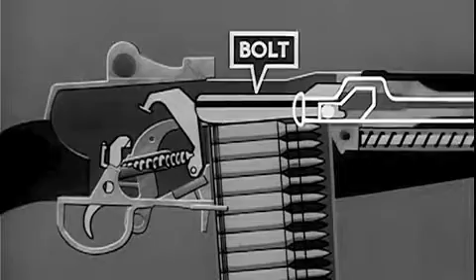To start the feeding step, the bolt is moved to the rear. A cartridge from the magazine is fed into position for chambering by the spring-loaded follower in the bottom of the magazine.

On the forward movement of the bolt, the hammer is cocked and a cartridge is stripped from the magazine. The cartridge is chambered. The bolt is locked. The rifle is now cocked and ready to be fired when the safety is off.

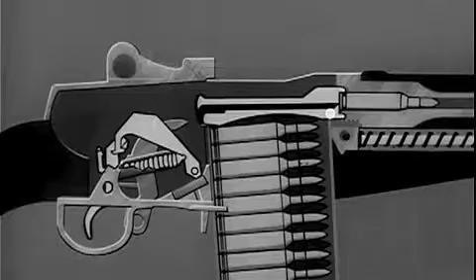By pressing the trigger, the hammer is released, firing the cartridge. Part of the propelling gas escapes to the gas cylinder.

The expanding gas in the gas cylinder drives the piston and operating rod to the rear and the bolt with it. On this rear movement, the bolt is unlocked.

The spent cartridge is extracted from the chamber and ejected from the rifle. At the same time, the hammer is again cocked and the cycle is ready to start over.

Now, let us see in greater detail how the 8 functions or steps are performed.

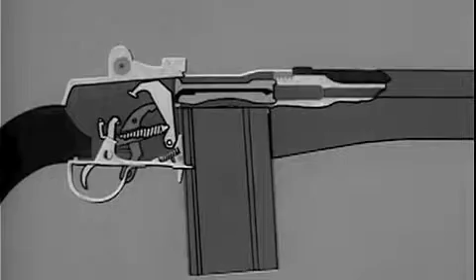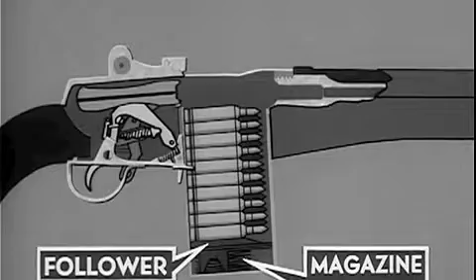When we move the bolt to the rear, by hand initially, the bolt clears the top cartridge in the magazine. The magazine spring, exerting pressure against the follower, forces the top cartridge up in front of the bolt in position for chambering.

Let us look at it again.

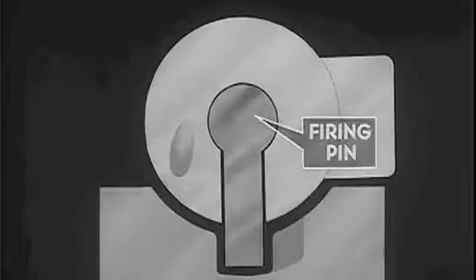When the bolt is moved to the rear, the bolt rotates. Rotation of the bolt during unlocking cams the hammer slightly rearward. It also moves the firing pin rearward as the firing pin tang contacts the camming surface on the bridge of the receiver.

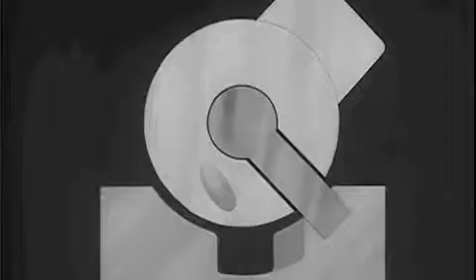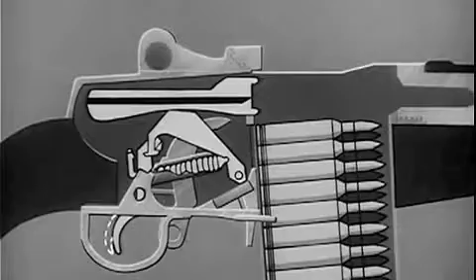As the bolt continues to the rear, the feed rib on the bottom of the bolt forces the hammer to the rear and down, pivoting the hammer on the hammer pin. The bolt continues rearward, riding over the hammer.

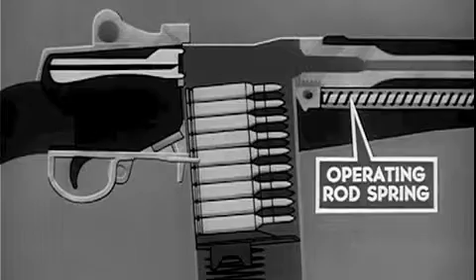The bolt is now driven forward by the expansion of the compressed operating rod spring. The bolt strips the topmost cartridge from the magazine. The cartridge is deflected upward by the feed ramp in the lower rear of the chamber and forced into the chamber.

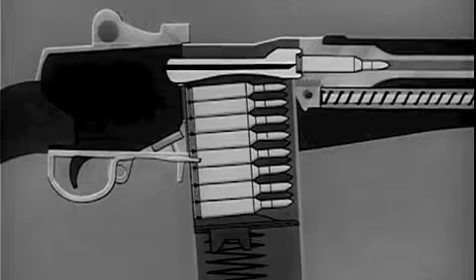Also, on the forward movement of the bolt, the extractor on the bolt face is forced outward by the rim of the cartridge. When the face of the bolt comes against the head of the cartridge, the extractor spring expands, and the lip of the extractor engages the extracting groove of the cartridge.

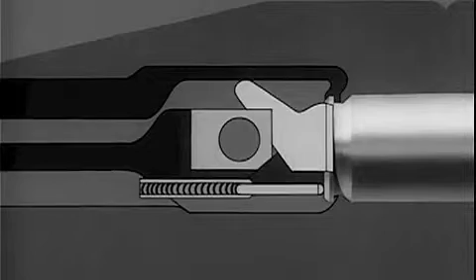Finally, the bolt is locked. Locking of the bolt is accomplished by the rear of the camming surface in the hump of the operating rod.

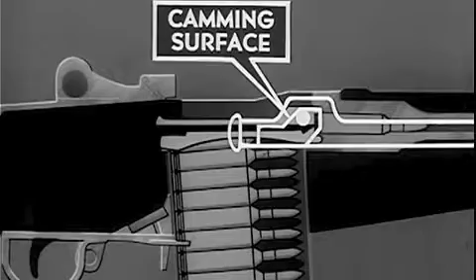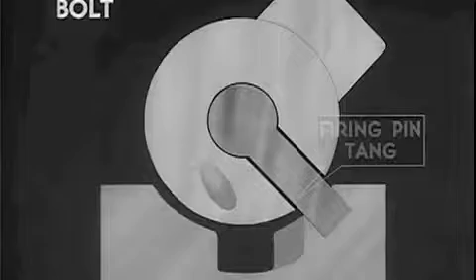The camming surface contacts the anti-friction roller on the locking lug and rotates the bolt clockwise. By the clockwise rotation, the locking lugs on the bolt are forced into the locking recess of the receiver. Meanwhile, the firing pin tang is aligned with the notch in the bridge of the receiver.

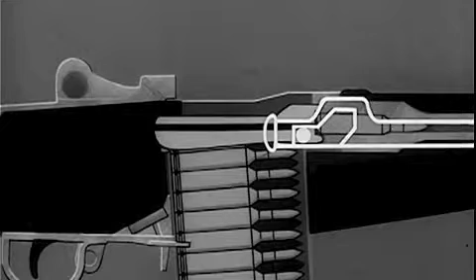The operating rod continues its forward movement for 3/8 of an inch. During chambering and locking, the operating rod is repositioning the gas piston.

With the first round chambered and locked, the next step is firing. Firing is initiated in the firing mechanism assembly, which consists of the hammer.

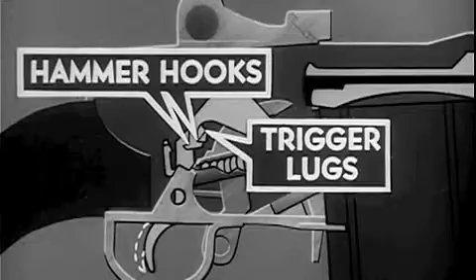The hammer spring drives the hammer and is compressed when the hammer is cocked. The hammer hooks are held by the trigger lugs. The safety engages the hammer and blocks movement of the trigger when in the rear safe position. And the sear.

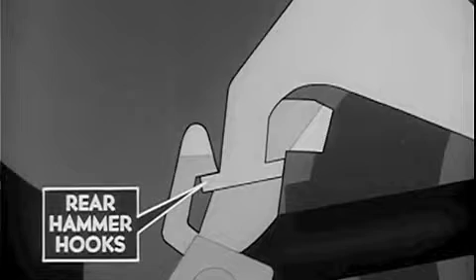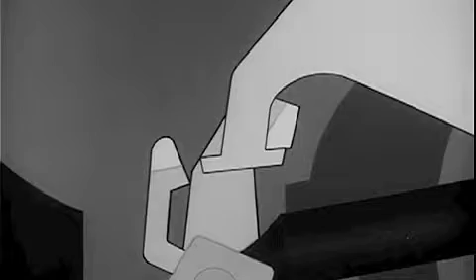The movement of the bolt to the rear forces the rear hammer hooks into engagement with the sear, which prevents the hammer from following the bolt forward. When the trigger is released, the front hammer hook will be engaged by the trigger lugs as soon as the sear releases the rear hammer hooks.

When the trigger is squeezed, the trigger lugs release the hammer hooks so that the hammer spring can drive the hammer forward. The hammer strikes the tang of the firing pin and moves it forward. The firing pin strikes the primer on the base of the cartridge, igniting the powder.

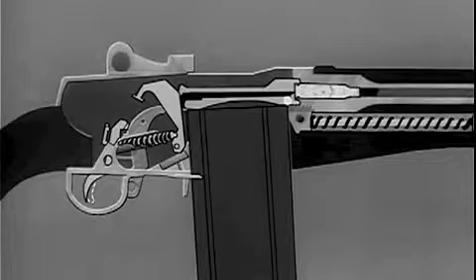When the cartridge is fired in the chamber, gas pressures build up, and a gas pressure of 50,000 pounds per square inch is exerted in every direction. It cannot escape to the rear because the locked bolt holds the case in the chamber, and the brass case is expanded against the chamber walls, effectively sealing the chamber.

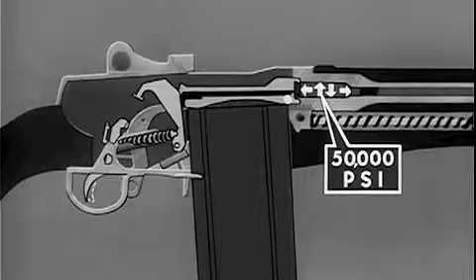The gas can only escape by propelling the bullet out through the muzzle of the rifle. Near the muzzle is the gas port in the barrel, and as the bullet clears the gas port, part of the gas is bled off, entering the gas cylinder and piston.

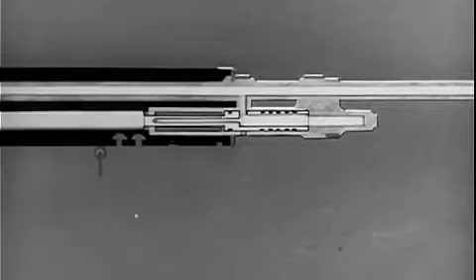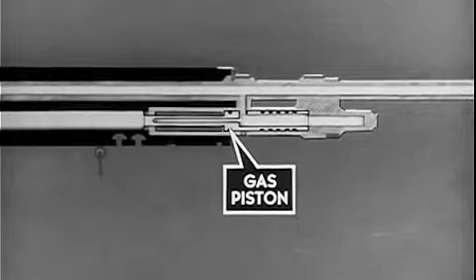As gas enters the piston, it expands into the gas cylinder plug. Continued expansion of gas builds up a pressure which forces the gas piston to the rear. The initial rearward movement of the piston shuts off the barrel gas port. The pressure exerted against the piston drives it to the rear 1 1/2 inches.

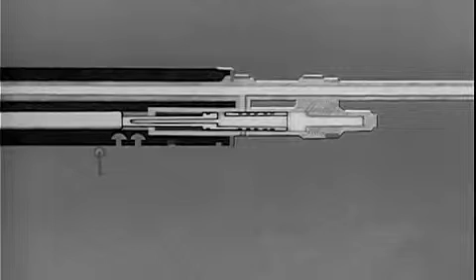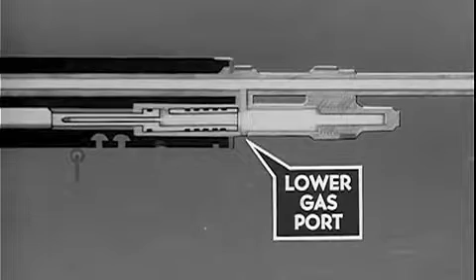As the piston clears the lower gas port in the gas cylinder, the gas pressure instantly vents to the open air, removing all driving force from the piston.

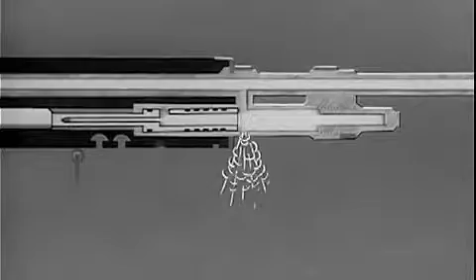During the 1 1/2 inch movement of the piston rearward, the piston is forcing the operating rod to the rear. After completion of piston travel, the force of inertia causes the operating rod to continue to the rear until the termination of recoil. Recoil ends when the shoulder of the operating rod contacts the front end of the receiver.

The operating rod spring now expands and forces the operating rod forward in preparation for firing of the next round. In the forward movement, the front end of the operating rod repositions the gas piston, which comes to rest against the gas cylinder plug. To see how unlocking was accomplished, we will repeat the action.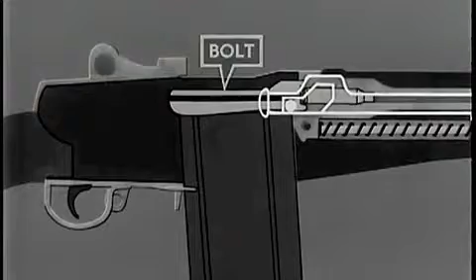When the operating rod moved rearward, it accomplished several things, the first of which was the unlocking of the bolt. Before the bolt starts to unlock, the operating rod permits 3/8 of an inch of free travel to the rear. This is a safety factor, permitting the bullet to leave the muzzle and gas pressure to subside before unlocking begins. This prevents gas from blowing back into the rifleman's face when the bolt unlocks.

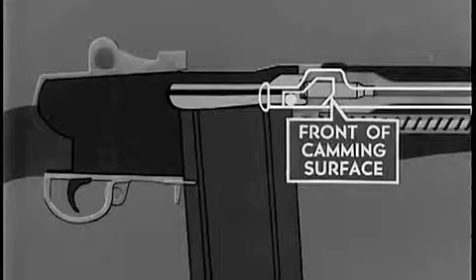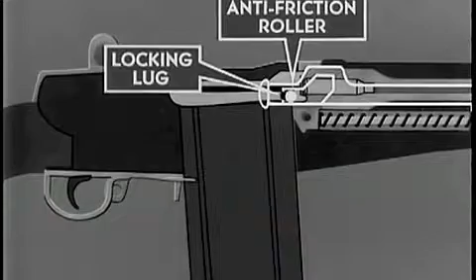At the completion of free travel, the front of the camming surface in the hump of the operating rod comes in contact with the anti-friction roller on the right locking lug. This rotates the bolt counterclockwise, forcing the locking lug on the bolt out of the locking recess in the receiver and unlocking the bolt.

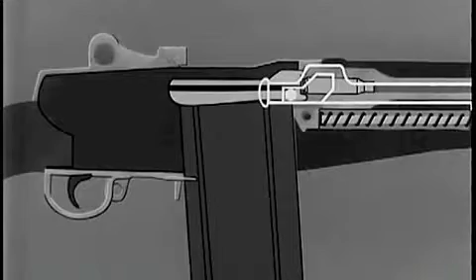While the bolt is being unlocked, slow initial extraction takes place. The rim of the cartridge case is gripped firmly by the extractor. A slow twisting pull called slow initial extraction is imparted by the rotating bolt.